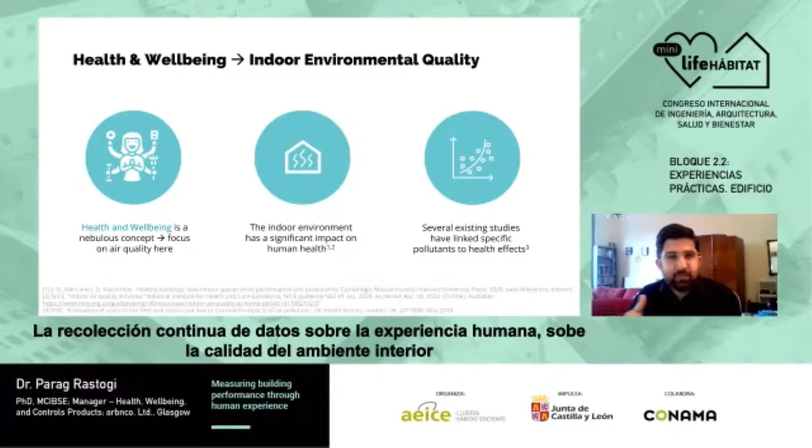The first thing is continuous monitoring and feedback. Continuous collection of data about human experience, about indoor environment quality, is a natural progression of green building best practice. So if you come to this conference, you're probably thinking about green buildings. If you're not thinking about them, you're at least acting on them. So you are probably a thought leader. You are here to learn.

I'd like to say that this is actually a natural progression to go from design intent to operational reality. The data gathered are useful beyond just compliance and certification. Obviously we want compliance, we want certification, but this data is actually more useful than just that—for example, for COVID and re-entry, energy efficiency, controls, and I'll talk a little bit about these applications later.

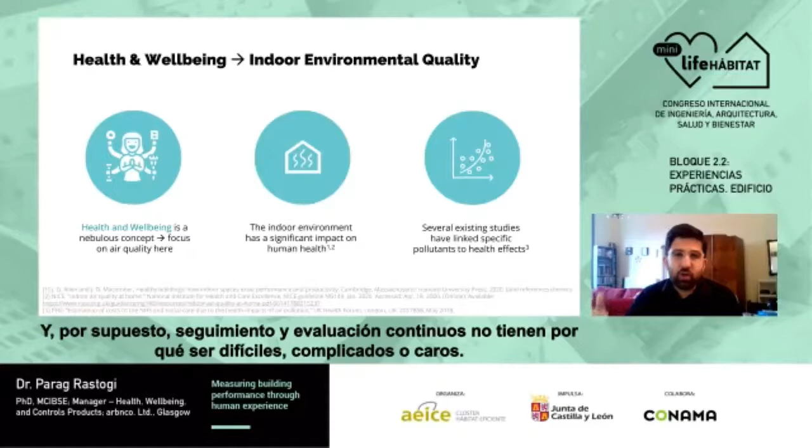And then, of course, continuous monitoring and feedback does not have to be complicated, cumbersome, or expensive. And that's a real myth that has to be busted. This is probably because, of course, when a technology is new, it can be a little cumbersome, it can be expensive. And people, I understand the hesitancy around sensors, around collecting feedback.

Do you want to expose the building performance? Do you really want to know what people are thinking? But this is all sort of growing pains. And as we move green buildings into the new era of healthy buildings, of buildings that promote health, data collection lets us begin to have an overview of what human-centric measurement would be.

So measuring building performance through human experience—what would this really entail? Before I address that, I really should talk about the fact that, okay, we're talking about health and well-being. That's one of the themes of this conference.

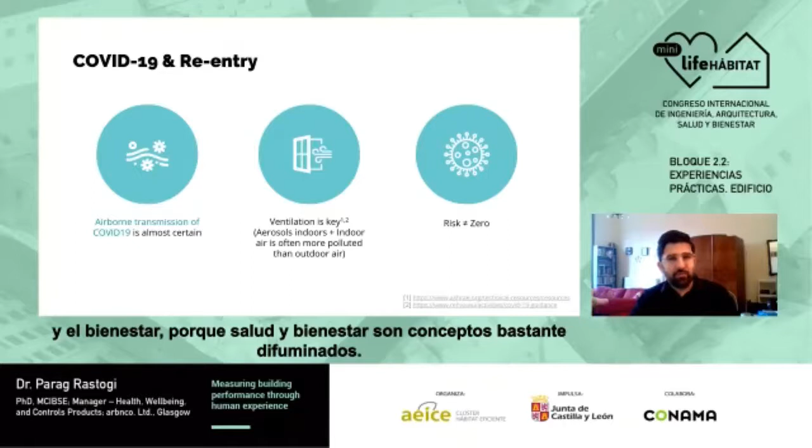In this particular presentation, I will focus on an aspect of health and well-being because health and well-being is a fairly nebulous concept. I'm going to focus on environmental quality, well, more specifically air quality here. So we're not talking about acoustic ambience or lighting, which are all important parts of environmental quality and influence your health and well-being. Health and well-being is also influenced by your HR factors, human resource factors, the environment of the workplace, and so on.

So in the context of building science, I'll focus on the indoor environment, especially how you measure it and how it affects health and well-being of humans.

We know it has a significant impact on human health. There are just a couple of resources I put down there. There are dozens and dozens of papers and books you can find on the impact of indoor environment on human health, especially air. There have been several existing studies that have linked human health to specific pollutants, and the environmental and human health and productivity impact of pollution. So it's not really up for debate anymore.

We spend up to 90% of our time indoors, so obviously the quality of the indoor environment has to affect how our long-term health pans out.

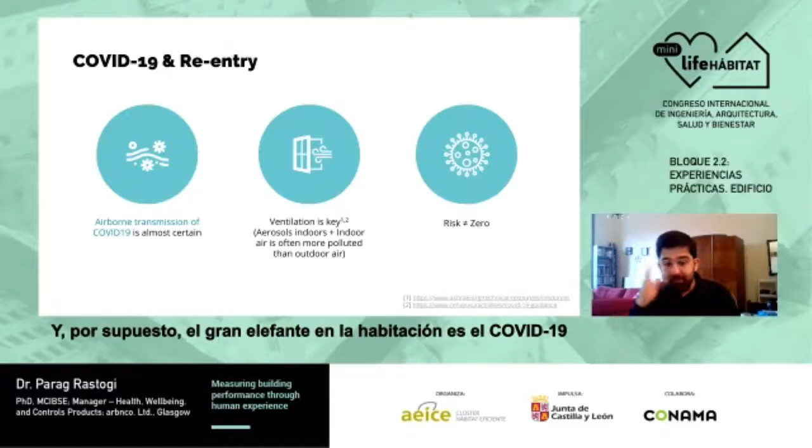And of course, the big elephant in the room is COVID-19. We know for sure that airborne transmission is certain. In fact, I should probably remove the word 'almost' there—it is certain. There is plenty of evidence.

We have, in fact—I just noticed I didn't have one of my key sources there, I can add it later—it's beyond doubt that airborne transmission of COVID is happening. If anything, it might be the dominant route.

I know there has been some controversy with the WHO, the CDC, and the EU not really focusing on airborne transmission at the beginning of the pandemic. We were very focused on disinfection of surfaces and all that stuff. Then more and more evidence built up that aerosol or airborne transmission is the dominant mode, which means ventilation is key.

I'll bring this back to why data collection is so important. Don't forget that indoor air is often more polluted than outdoor air, something a lot of us don't really think about. If you look around at all the pollutant sources in your house, from the kitchen range to carpets, and in your offices with printers and so on, you can begin to see why indoor air can be more polluted than outdoor air.

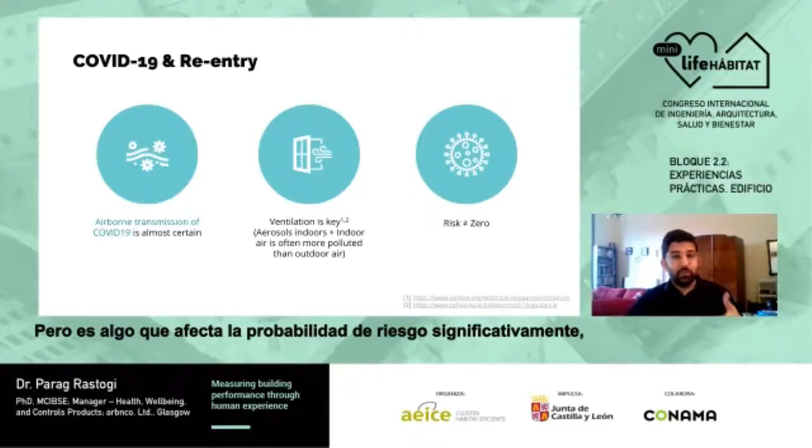Keep in mind that none of this data management, data collection, and feedback will make the risk exactly zero. That's not what we can achieve, and that's not what I'm going to claim. But it does affect the risk probability quite significantly—a better managed building will reduce your chances of transmitting COVID-19 through the airborne route.

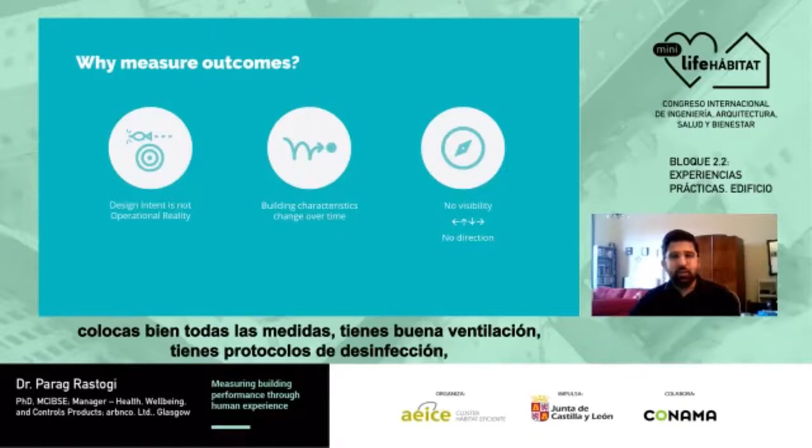Let's say you bought into the science and think that's a good idea, that's how we should go. So you've designed your building correctly, put all the measures in place. You've got good ventilation, disinfection protocols, administrative protocols to make sure people don't show up when they're ill. You've used the best materials so they don't give off VOCs, volatile organic compounds, and great filtration in your HVAC system, and so on.

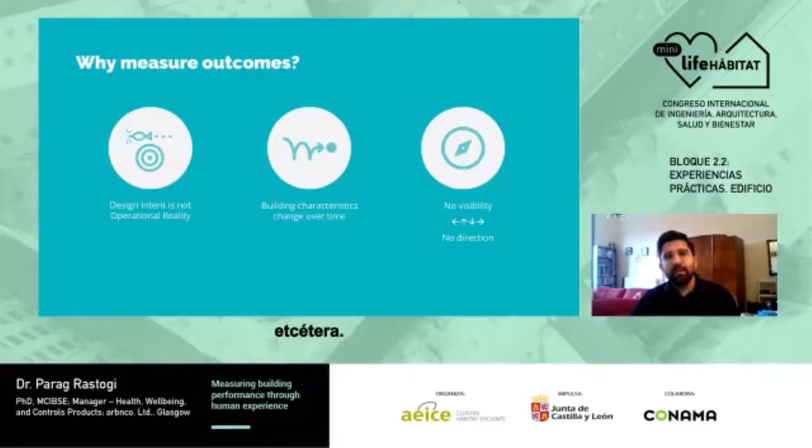But the problem is that design intent does not equal operational reality.

There's this big concept in the UK now and across the world called soft landings. A soft landing is when the design and construction team hands over to the operation team and owners—you don't just crash land. The handover isn't just 'here are the keys, bye.' It's more like, we commission the building, we show you how to work it. There are dozens of steps; you can look them up. Just Google soft landings, and I highly encourage you to do that.

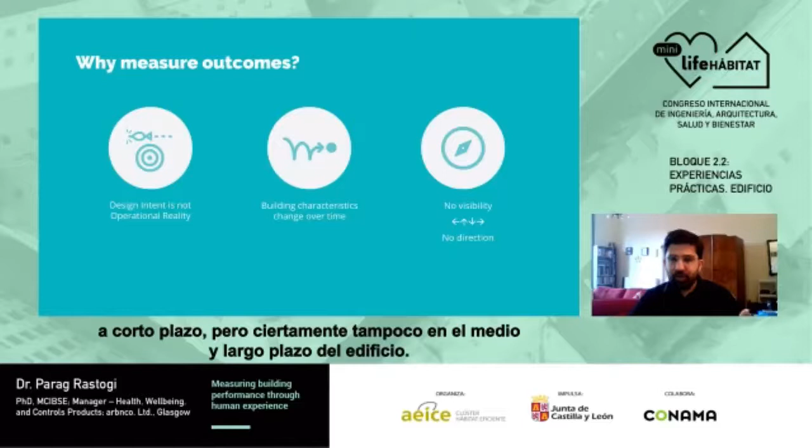The point is that design intent does not translate to operational reality in the short term, but certainly not in the medium and long term. Building characteristics change over time—usage can change, materials degrade, and the building surroundings may change. None of this is necessarily bad; that's just how buildings are.

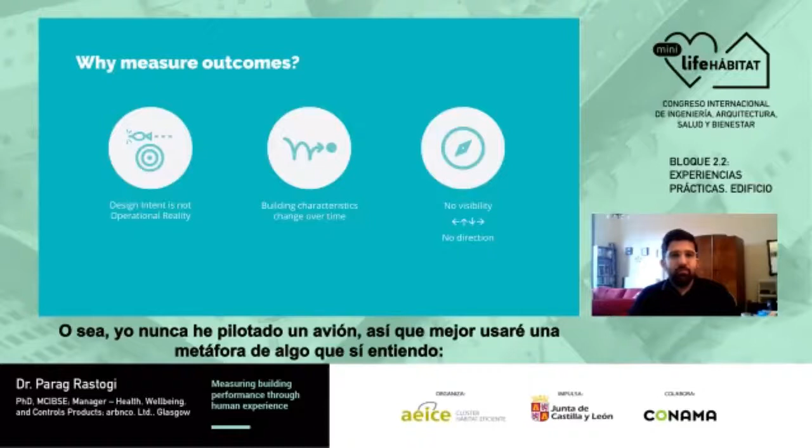So if you're not measuring the human experience in buildings, you essentially end up with no direction and no visibility. It's the equivalent of flying without radar, or—since I've never flown a plane, I'll use a metaphor I understand—it's like trying to ski in the mountains in complete fog. You don't even know which way is up.

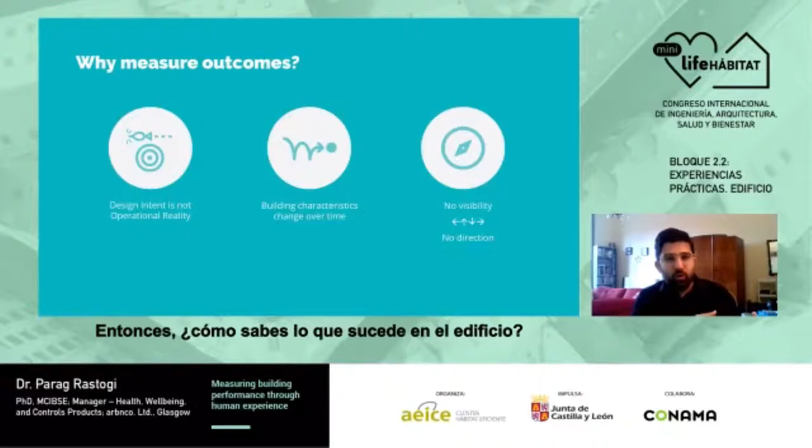When we think about buildings which are increasingly managed remotely—yes, some buildings have a facility manager on site, I'm thinking about office or big institutional buildings—a lot of buildings are now managed remotely. So how do you know what's going on in the building? Do you just wait for people to complain? By the time people complain, they're either annoyed, or they've lost productivity, or their health has been affected. So why are we waiting until that's actually happened?

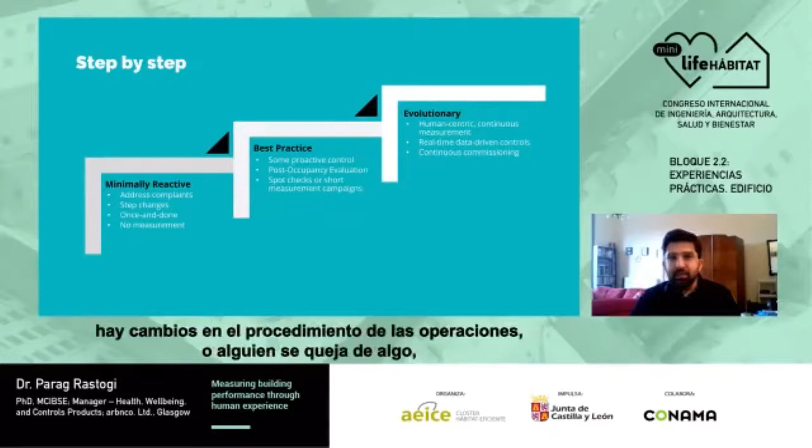Thinking about how to go step by step from where you are as a green building professional—in my minimum category, I've already put what you'd expect a high performance building to be today. You need to address complaints. There are step changes in operations: somebody complains about something, and you change it—temperature, ventilation, whatever it is. It's once and done; you make the change, and that's it. You come back for the next problem and solve that one.

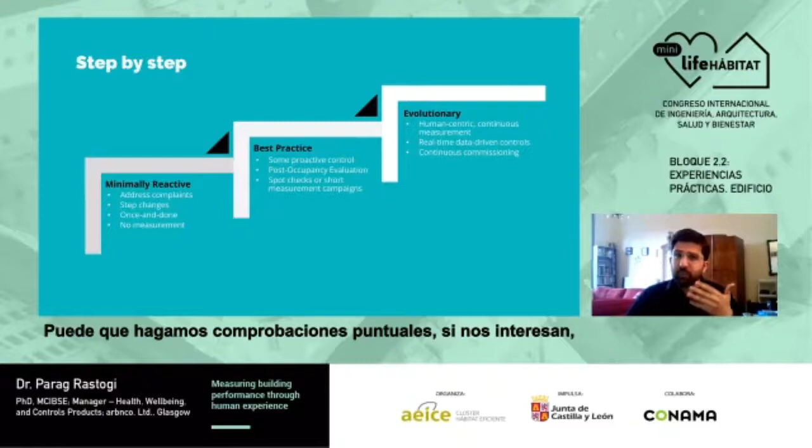And there's usually no measurement, though there might be some spot checks if you were interested in that sort of thing. If you had a more forward-thinking team, you might have done a little bit of measurement. So let's say you moved on to best practice—then you have some proactive control.

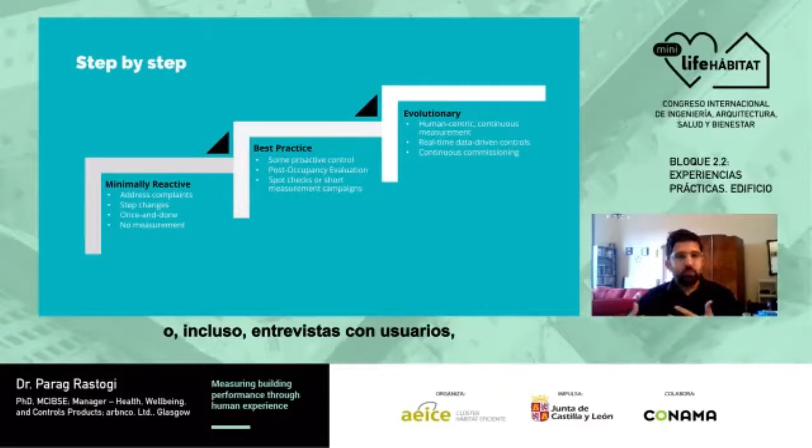You can anticipate a little bit what the usage of the building is going to be, what the climate is going to be, and then you change according to that. You do some post-occupancy evaluation, which usually takes the form of surveys or interviews with occupants. Maybe the facility manager or the design team comes back and visits the building again and talks to the occupants.

And you might do spot checks and short measurement campaigns. So, going from a no-measurement or very little measurement paradigm to saying, okay, well, we do some sort of regular spot checks, or every once in a while, if there's a complaint of something specific, we investigate it with data. Well, what I'm talking about is the next level, the evolutionary trajectory that we should be taking.

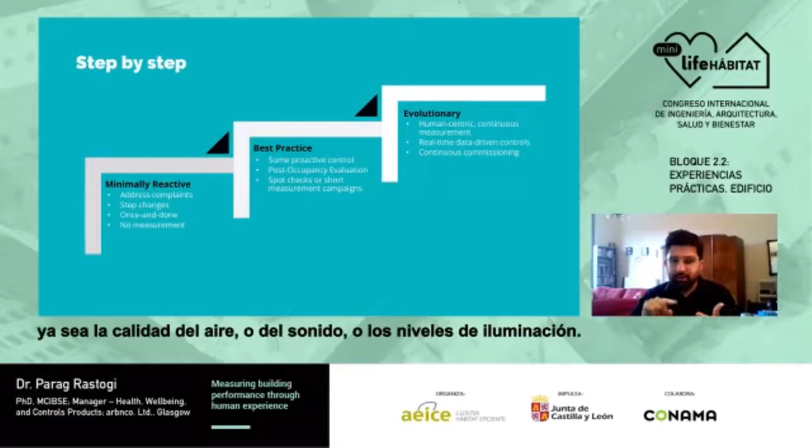And that's human-centric continuous measurement. I know this word human-centric sometimes doesn't, it's also a little bit nebulous. What I mean by this is measuring parameters about a building that matter to the human experience, whether this is air quality, acoustic quality, lighting levels, accessibility, perception of the indoor environment, and so many other things, right?

I'm just going to focus a little bit more on air quality today, but there are other aspects here. Because that's my specialty. So I should talk about what I know, right?

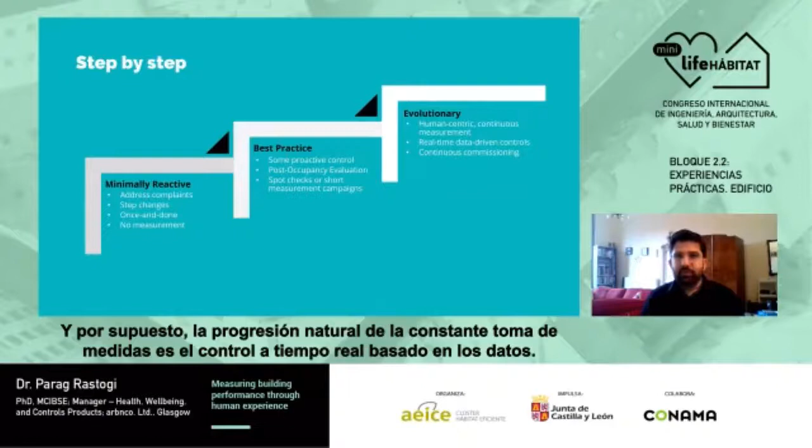And of course, the natural progression of continuous measurement is real-time data-driven controls. Again, this doesn't have to be particularly complicated. I know this sounds like I'm adding so many buzzwords here, real-time, data-driven. But all that means is you have a control mechanism that responds to data that is relevant to the human experience, whether that's high resolution air quality measurements or occupant feedback or anything of that sort, right?

And of course, that leads to this idea of continuous commissioning. Continuous commissioning is by no means a new idea. It's existed for decades. I heard about this when I was in university, and that was some time ago. So, we're just trying to enable continuous commissioning

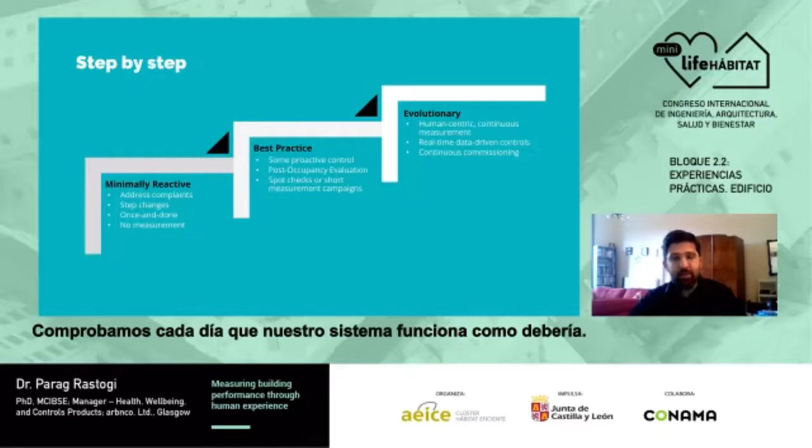using automation, using measurements, including stakeholders such as the people who occupy the building, so that it's truly continuous. It's not just, you come in once every 5 years and check, some human being goes around and checks everything and ticks boxes to make sure that the system is working as intended. We check every day, every hour, that the system is working as intended. It's delivering the human outcomes that should be delivered.

This framework that I'm talking about, I'll break it down into 4 simple steps, right? Obviously, nothing's ever going to be completely as simple as I'd like to make it out on the slide, but let's try and at least break it down into 4 categories. So, at the top lies, of course, engineering and administrative policy. You need policy, you need buy-in from all stakeholders. You need to build on existing knowledge to propose engineering and administrative policy.

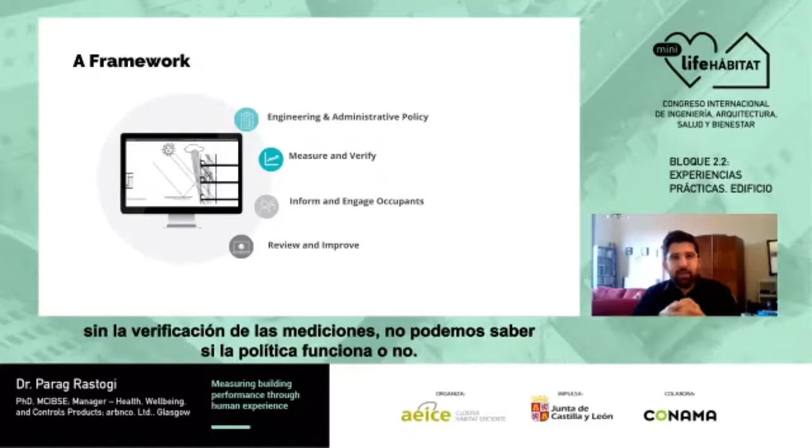The second step is you must include measurement and verification, because one of the reasons it's necessary to measure human experience in this context is because without measurement and verification, you don't know if your policy worked or not. The third part is, of course, informing and engaging occupants, the people who occupy the building, and review and improve, cycling back again, right?

So let's get a little bit into the nitty-gritty of what I'm talking about, what kind of measurements I'm talking about. So what are we actually measuring, right? In this case, I'm talking about air quality. Like I said, there are other aspects of environmental quality and human experience that I won't necessarily touch on today, but they do exist. So in the case of air quality, for example, health outcomes and pathogens are actually difficult, maybe impossible to measure directly.

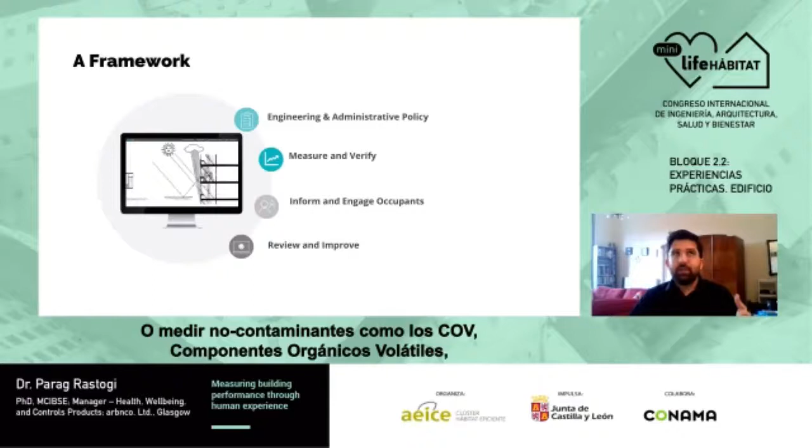So what we end up doing is we measure indicators, such as CO2, or measure known pollutants such as particulate matter or TVOC, total volatile organic compounds. I'm sure these are keywords you've been hearing a lot about recently, if not before that. And we test periodically for hazards, your really nasty chemicals, and often that ends up being statutory compliance, so your compliance with laws.

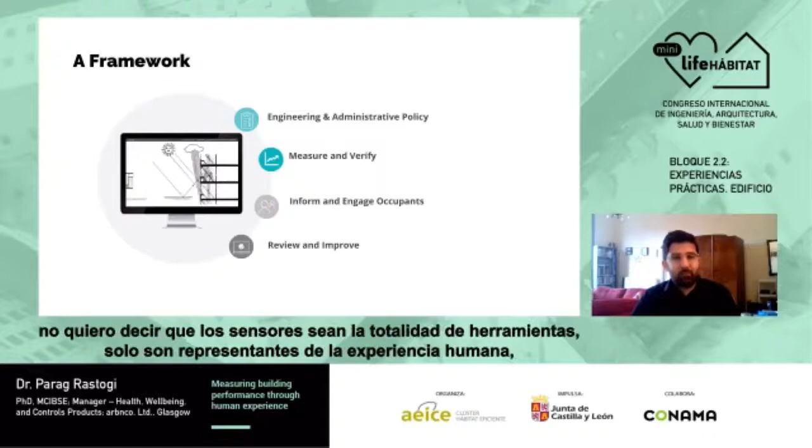And as far as the human experience that we can measure, we do need to track outcomes not measurable by sensors. I'm not saying sensors are the be-all and end-all of everything. They're just proxies for the human experience. We need proactive feedback, so are the policies actually working?

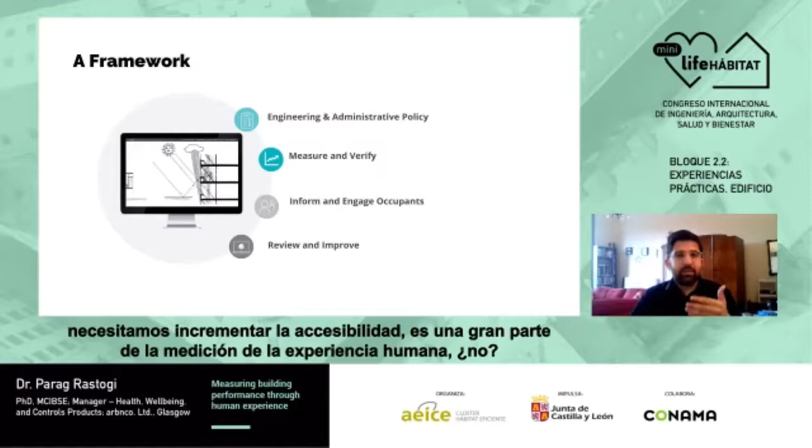Are there hazards developing, or are they being controlled? Nobody knows this better than somebody who's actually in the building. And of course, we need user acceptance. We need to increase accessibility, and that's a big part of human experience measurement.

There are some caveats here. There are unproven technologies being sold right now. I won't go into the details of what they are, but just because there's a novel measurement doesn't mean it's useful, doesn't mean it's valid. You need to look out for the validation.

I'm a seller of measurement tools and systems, and I will say to you, don't believe me. Make sure you have independent academic verification, institutional verification of the claims that manufacturers are making. Ask for data sheets, ask for validation studies.

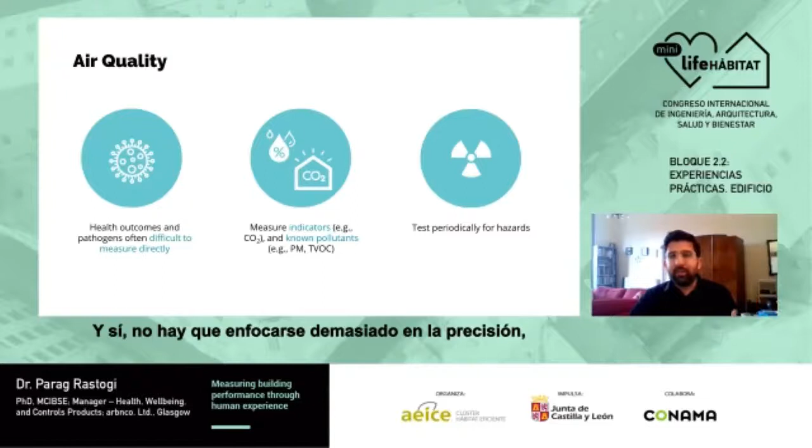Yeah, I mean, I get it. Don't get too hung up on accuracy and whether it goes to the second decimal point. Let's put this into context, let's have some perspective. But the utility of each measurement should be proven before you start doing it, because sometimes if you measure the wrong thing, you might end up optimizing the wrong thing and sort of make things worse.

Too much focus on measurement can detract from human experience. So yes, I'm talking about measurement and data relevant to human experience - how to measure building performance for human experience.

Sometimes, and I'm guilty of this as much as anybody, it's so exciting to measure things using sensors that we sort of forget about the fact that actually at the end of the day, it's a human experience that I can't really quite measure. I can only do proxies.

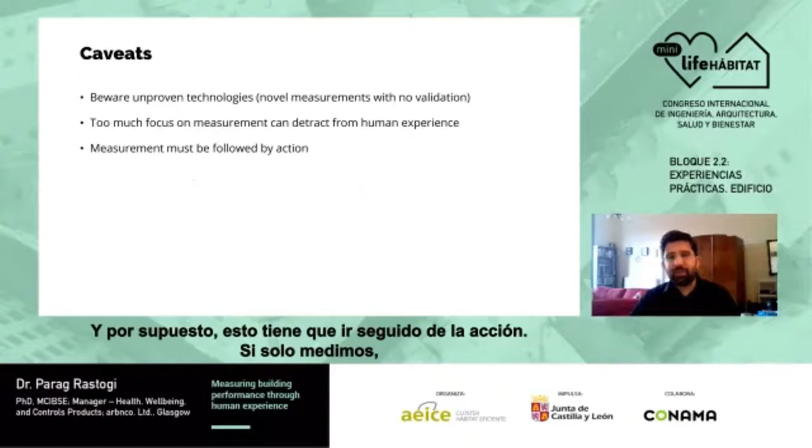And of course, it must be followed by action. If you just keep measuring, it can lead to disillusionment, where it's like, okay, well, we highlighted problems and nothing seems to have been done about it.

Of course, the second big question being when to measure. So as you can see from my subtitle there, my bias is you should measure all the time and everywhere. So I'll talk a little bit about the difference between continuous and one-off measurements. I'm talking in the context of air quality, but this applies to really any measurement.

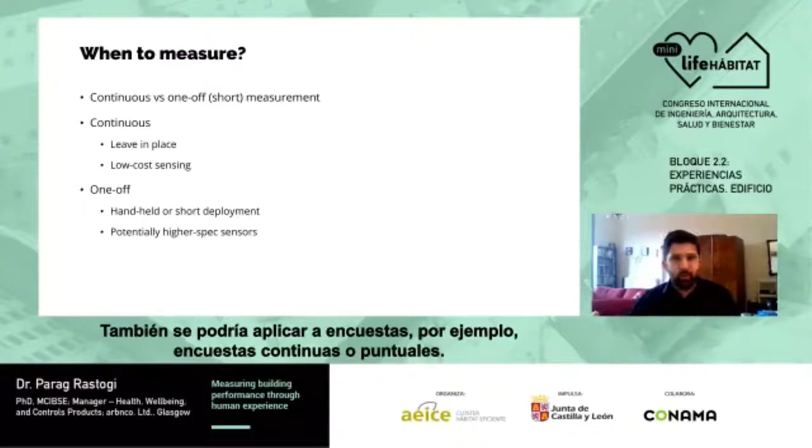It could even apply to surveys, so continuous surveying versus one-off surveying. Just to make the distinction, continuous is leave in place, low cost, and one-off is handheld or short deployments, potentially higher spec sensors - so potentially more expensive, but also more accurate sensors.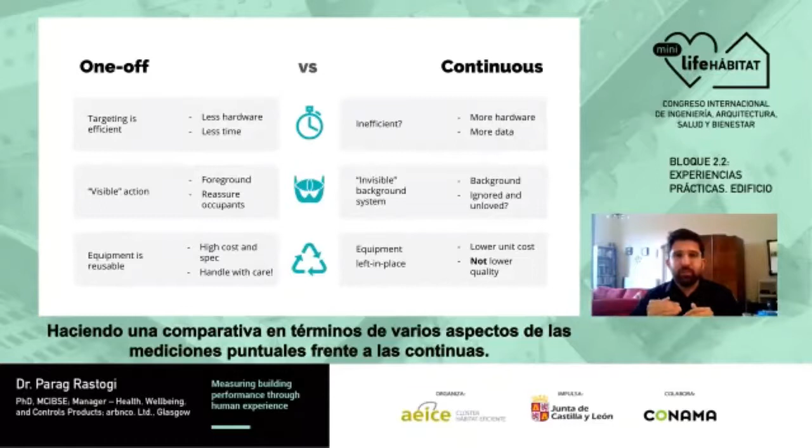In comparison, in terms of various aspects of one-off versus continuous measurement, when you do a one-off measurement, you're targeting the measurement. That can be quite efficient, because you'll probably need less hardware, less time, and because you know exactly where the problem is, you go there, you measure, you ask people, you survey people, and you try to characterize the problem.

This means continuous monitoring could be potentially less efficient, because you require more hardware, you need to leave it in place, and you have a lot more data. Let's not underestimate handling data and how complicated that can sometimes be.

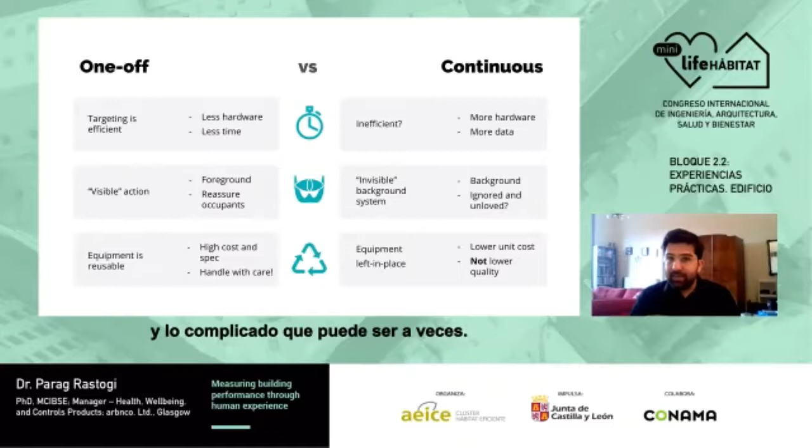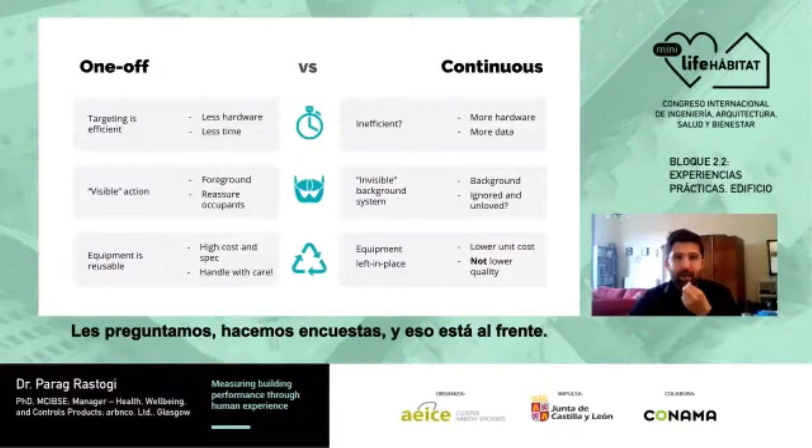You do address a visible action when you're talking about one-off measurements. A problem occurs - when I say visible, I mean perceptible - a problem occurs and somebody talks about it, somebody complains about it, and then you go and reassure the occupants by putting in measurements. You go and ask them, you do surveys, and it's very much in the foreground.

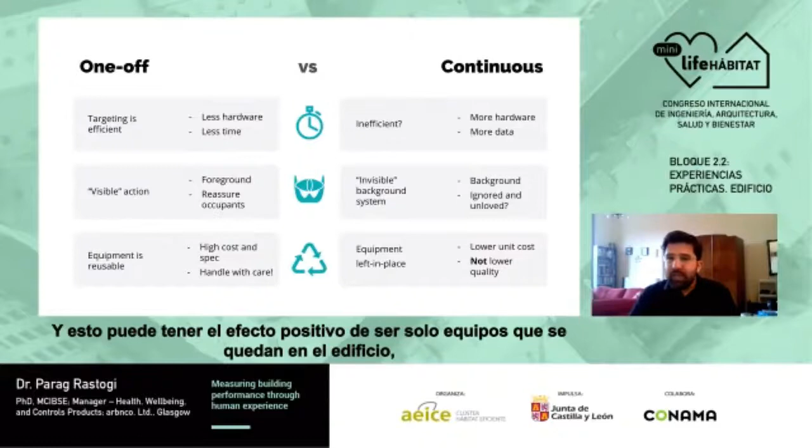On the other hand, a continuous monitoring system could be invisible in the background, and it could potentially be unloved, ignored, right in the background. Nobody understands why those bits of kit are in the office, and you just leave them there. This can sometimes have the effect of hardware that stays in the building and nobody knows why it's there, and people lose interest in it. So that is definitely a potential downside of continuous monitoring.

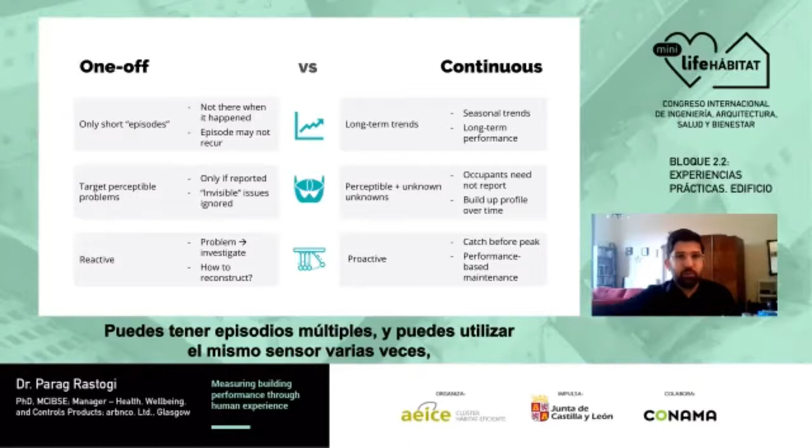On one-off measurement, equipment is more expensive, but it's potentially reusable. So you can have multiple episodes, and you can use the same sensors several times. But be careful, because it's often quite difficult to manage scientific grade sensors.

When you leave the equipment in place for continuous monitoring, on the other hand, you will have lower unit costs - the sensors are going to be cheaper. In fact, sensors are getting cheaper all the time. But that does not mean it has to be lower quality. This is really a line I must draw under: low cost does not mean low quality anymore. It's good enough quality that you're looking for.

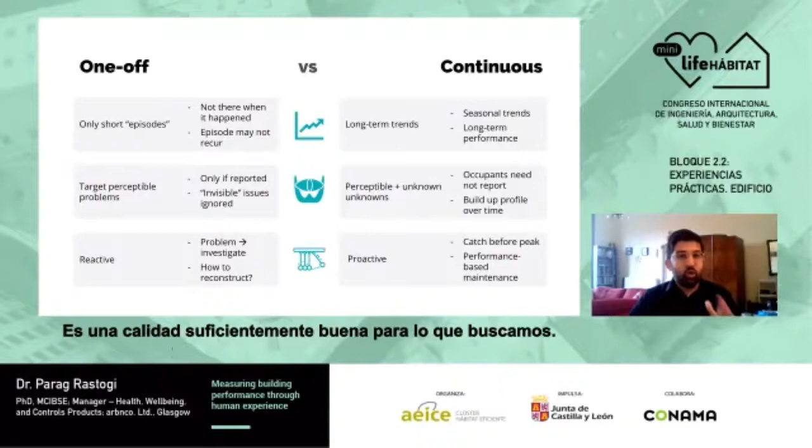Of course, the trade-off there is that you end up measuring only short episodes with one-off sensing. You may not be there when it happened, you may not be able to reproduce the episode, it may not recur on its own.

Whereas with long-term continuous monitoring, you can check trends, seasonal trends, long-term performance, which people completely forget. The building is going to be around for decades and decades.

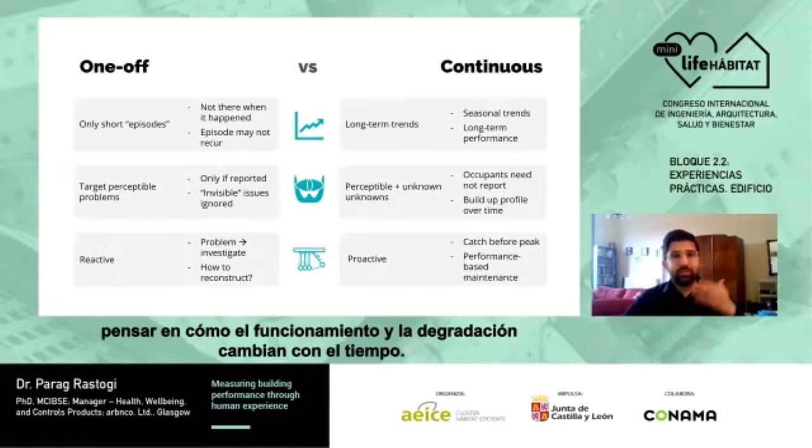You target perceptible problems, but only if they are reported, so invisible issues are ignored. Sometimes air quality issues and environmental quality issues are invisible.

Whereas with continuous monitoring, the occupants don't necessarily need to report. You can just build up a profile over time. With one-off monitoring, you're being reactive: you have a problem, you investigate, and then you have to reconstruct the problem.

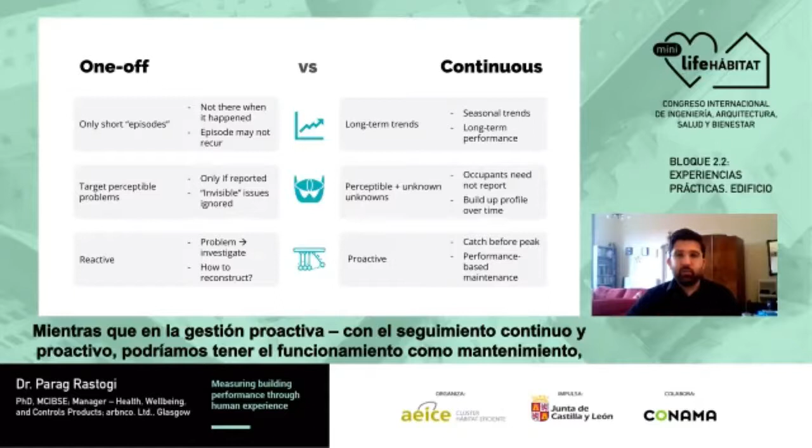Whereas in proactive management, with proactive continuous monitoring, you could have performance-based maintenance. You could catch the problem before it actually peaks, which is very useful to have. That was sort of my big spiel on when to measure, the temporal aspect of it.

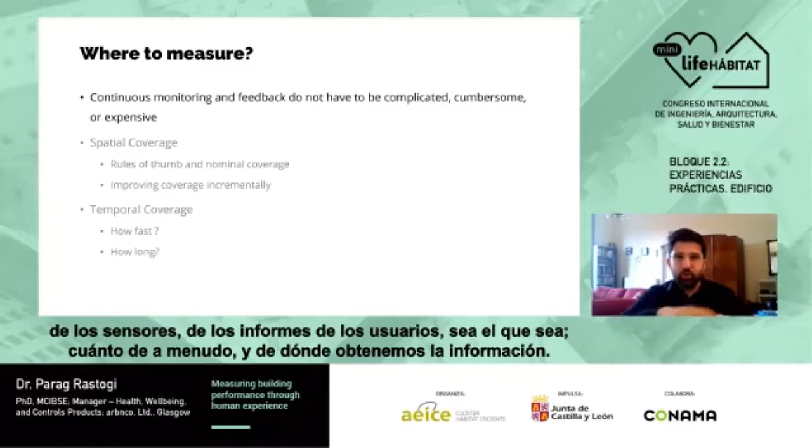I'll talk a little bit about where to measure. One of the things I said was continuous monitoring and feedback do not have to be complicated, cumbersome, and expensive. So I'll talk a little bit about spatial coverage and temporal coverage of sensing, of occupant feedback, whatever it is. How often and where do you get your feedback from?

Let's talk a little bit about rules of thumb for spatial coverage, nominal coverage, and how to improve it incrementally.

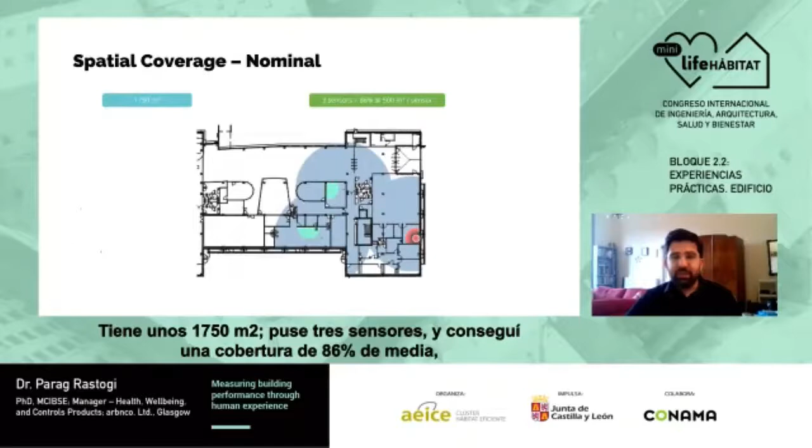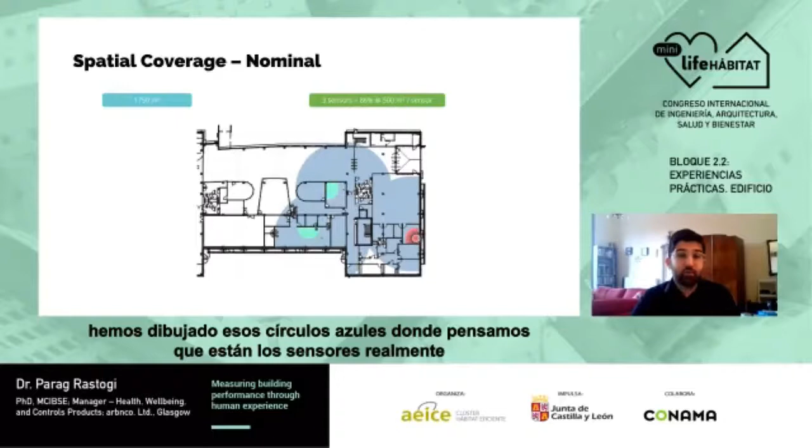I'll use the example of this building. I can't show you the whole building because it's a client's building, but trust me, this is a real building somewhere in Europe, about 1750 square meters. I put 3 sensors there and got roughly 86% coverage if you assume 500 square meters coverage per sensor, which is just a nominal coverage. We've drawn those big blue circles around roughly where we think the sensors actually are in the building right now, and as you can see, this coverage is extending beyond walls.

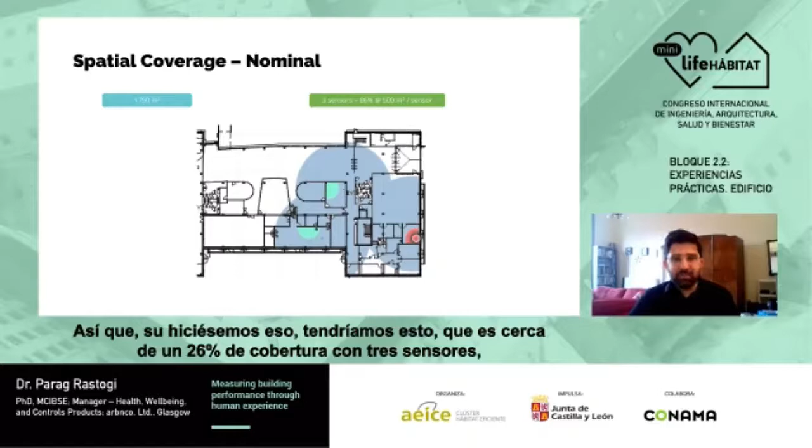So is that really a good idea? Does nominal coverage actually make sense, or should you really only consider that when a sensor is placed inside four walls, it only covers that room? If you were to do that, you'll end up with about 26% coverage with 3 sensors, because those sensors are inside rooms, and the coverage is reduced drastically.

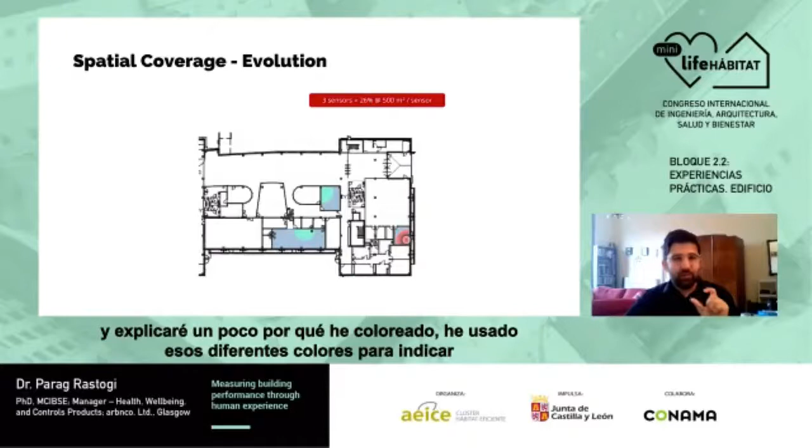My point in showing this and the next slide is to show that nominal coverage is a good place to start, but it's definitely not something we want to end up with for the rest of the decade or whatever. It needs to evolve a little bit as our tools to deploy get more sophisticated. I'll explain in a bit why I've used those different colors to denote 86% being green and 26% being red.

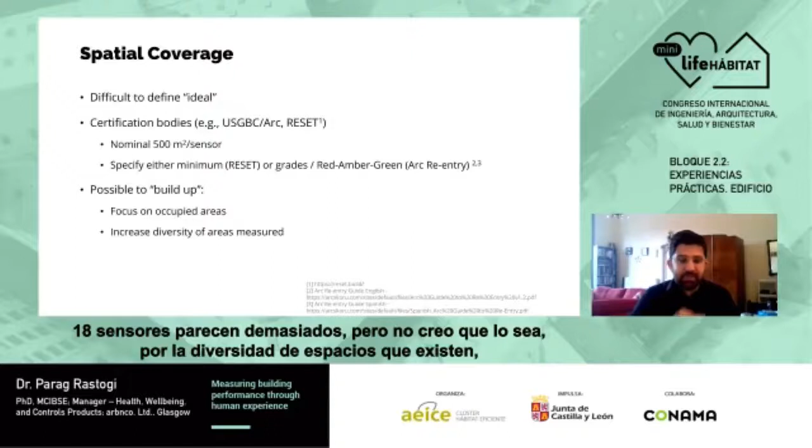I don't think it is, because there is a diversity of spaces, a diversity of usages. This space is well occupied, there's a fair amount of people there, so you do need to cover their changes in experience and locations as you go around the building.

As I said, it's difficult to define an ideal coverage, and you end up leaning on certification bodies, on standards. There seems to be a consensus developing around this nominal idea of a sensor covering 500 square meters. That's a slightly arbitrary number, and I think it's on the higher side of what a sensor can be set to cover. It depends a lot on the air distribution in a space, the usage of the space, how many people are in it, and so on.

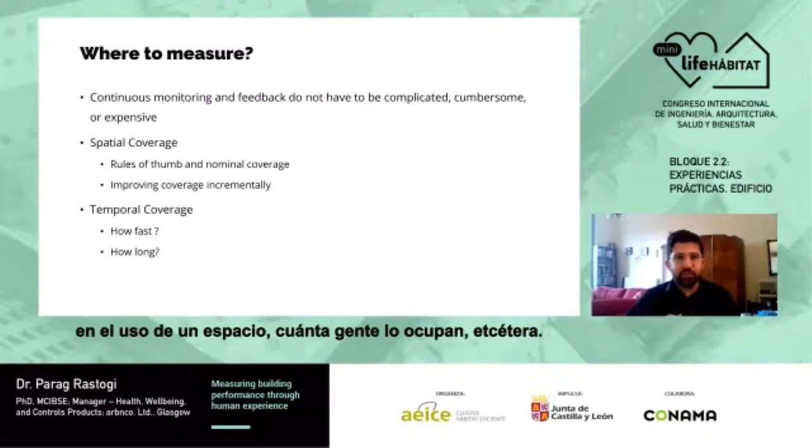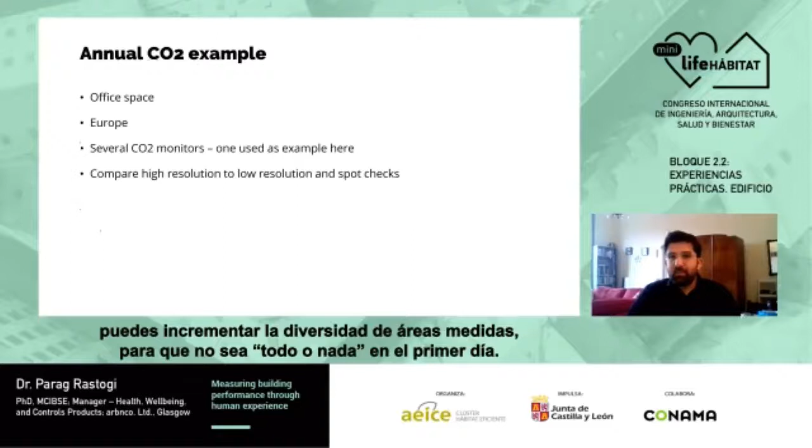But it's a place to start. It helps us standardize things. Certification bodies will specify either a minimum or some kind of red, amber, green grades. It's possible to build up over time. You can focus on occupied areas and build up over time, and increase the diversity of areas measured. So it's not all or nothing on the first day.

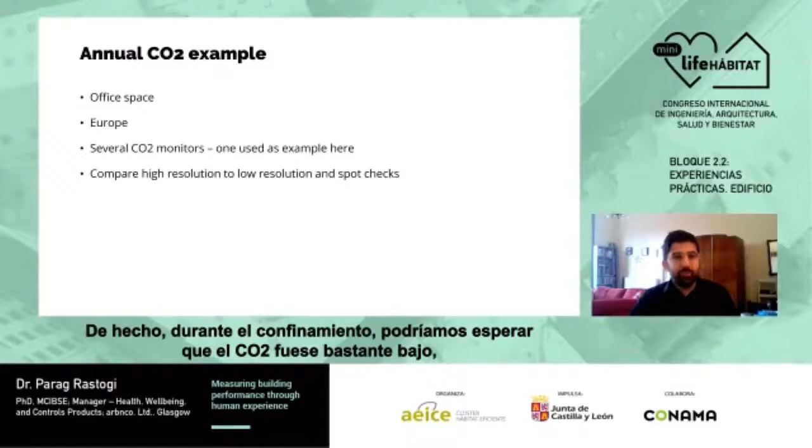Moving on to the second part, temporal coverage. I'll use an example of annual CO2 measurement from an office space in Europe. There were several CO2 monitors; I'm just using one as an example here, not an extreme one. It's a fairly regular measurement. In fact, during lockdown, you'd expect CO2 to be fairly low. I'll compare high resolution to low resolution and spot checks.

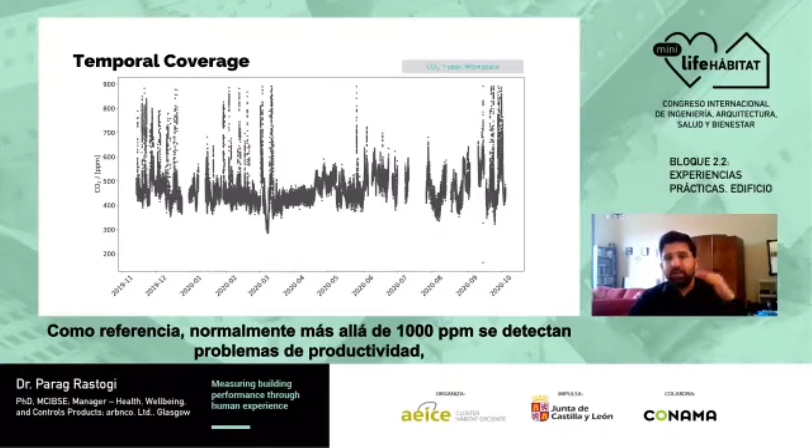So for temporal coverage, this is one year of workspace measurement. You can see there are some gaps. We're measuring CO2 here, and there's not really too many problems because even the peak doesn't really go much beyond 900 ppm, or doesn't go beyond 900 at all. For reference, usually above 1,000 ppm is where you start getting productivity issues. You might definitely get lack of ventilation, and potentially overcrowding.

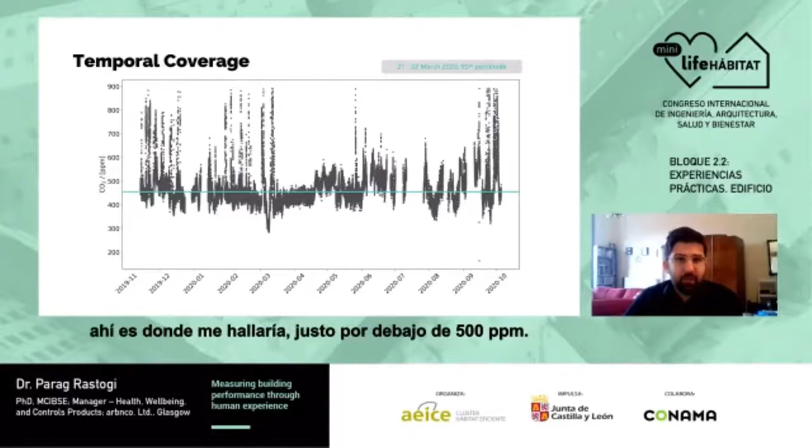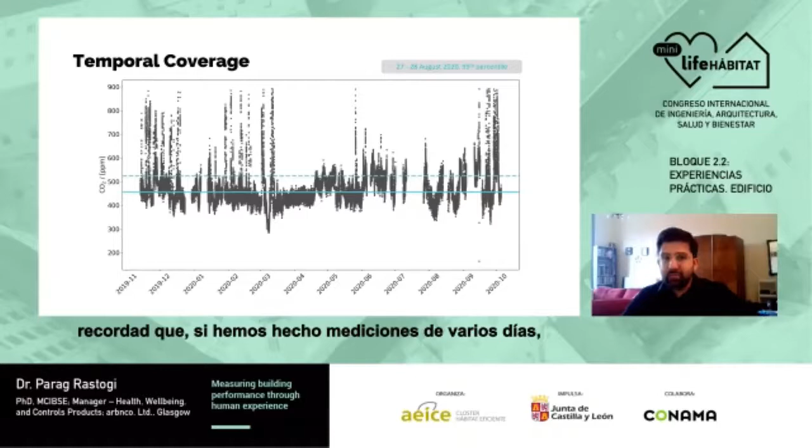So if I was to measure this on one day, the 21st or 22nd of March, and took the 95th percentile of that day, which is a pretty common way to measure things, I'd end up just under 500 ppm. This is clearly not representative of the annual profile of measurement in that room. So I took another arbitrary day of the year and the 95th percentile, and it was slightly higher, but again not representative. It doesn't really matter which day I took because it wouldn't be representative. My point here is spot checks can be helpful, but remember, you've done an entire day's worth of measurement here - hung around doing measurements for the whole day - and it's still not representative of the long-term evolution of CO2.

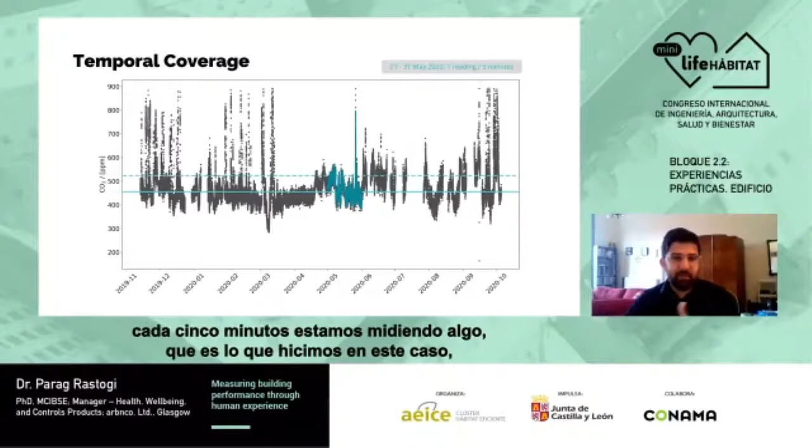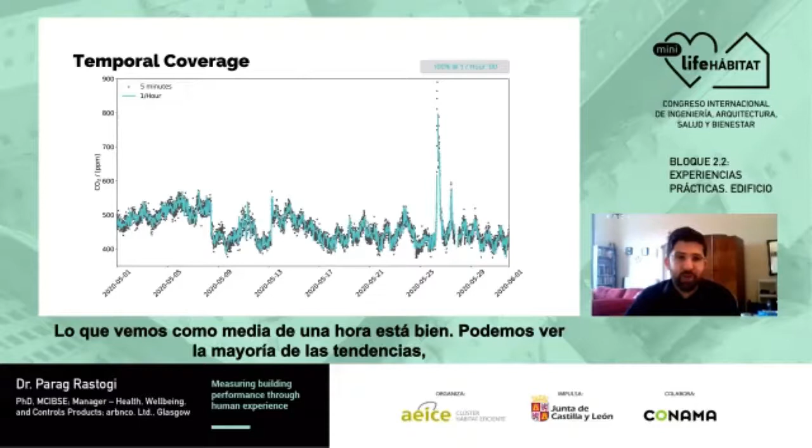If you assume 5 minutes to be the truth - I know you can get higher resolution than that, it's entirely possible, we just happened to land on 5 minutes in this case as the highest resolution we measured - what you see is an hourly average is fine. You can see most of the trends, you can see the peaks, the diurnal variation is quite evident. It makes sense if you look at this. I know the variation isn't huge because the area was quite sparsely occupied during 2020, mostly just essential staff. But you can see that once per hour is still doing a good job.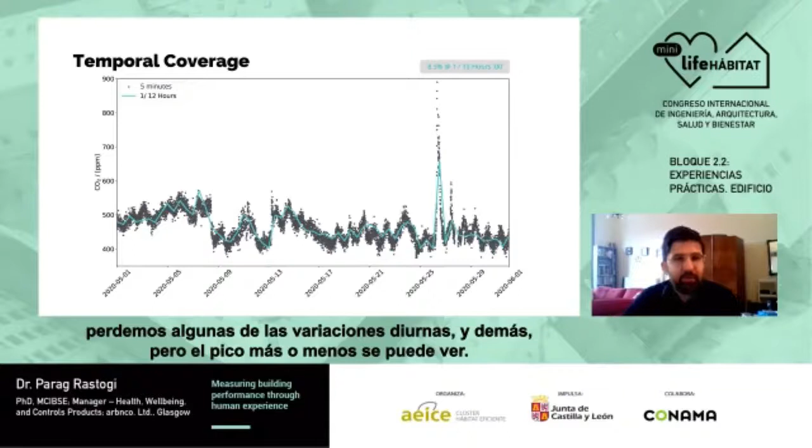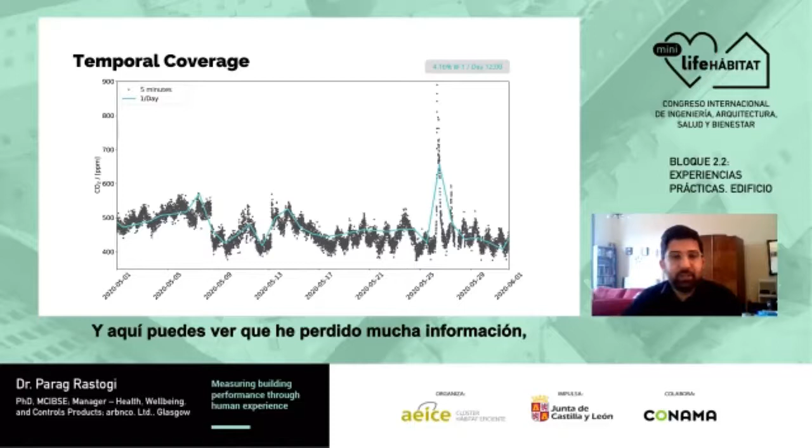Then in the next slide I do 4% coverage, which is one per day - 4% of the total hours in a year are being covered by a measurement. Just think about how small a number that is, if you just do one measurement per day, which is already way more than you do in a spot check. Here you can see I've lost a lot of information. Next slide, if I went once a month, or once a year, I'd get less than 1% coverage.

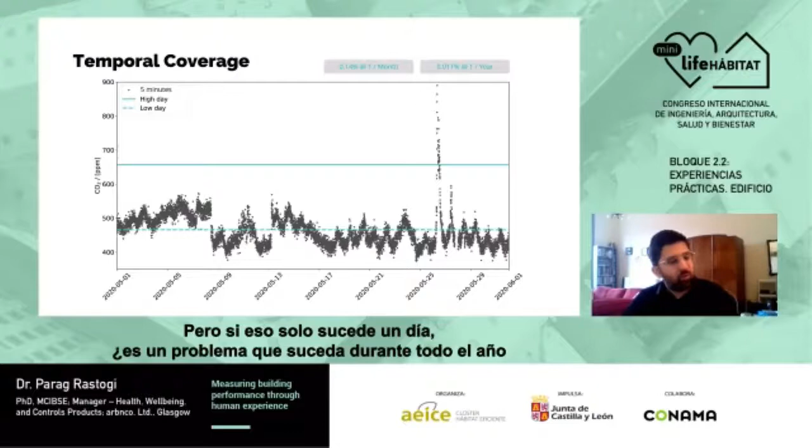Depending on whether I took the measurements on a high CO2 day or a low CO2 day, I could end up with radically different representative measurements. The numbers aren't too big in this case, but there are clear differences and they don't represent the space. We have other examples of places with 3,000 on a particular day, but that just happened on one day. Is that really a problem that occurs throughout the year? Well, you wouldn't know unless you did continuous measurement.

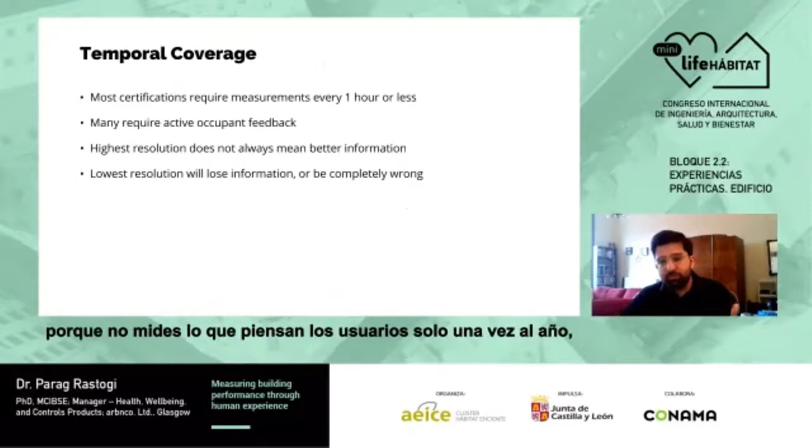So let's finish up on temporal coverage. Most certifications require measurements every hour or less. Many require active occupant feedback. That's also an aspect of temporal coverage, because you don't just measure once a year what your occupants are thinking - you have to do it continuously. Highest resolution does not always mean better information, but lowest resolution will definitely lose information or sometimes be completely wrong. So there's a very good argument from a temporal coverage perspective for continuous measurement rather than one-off.

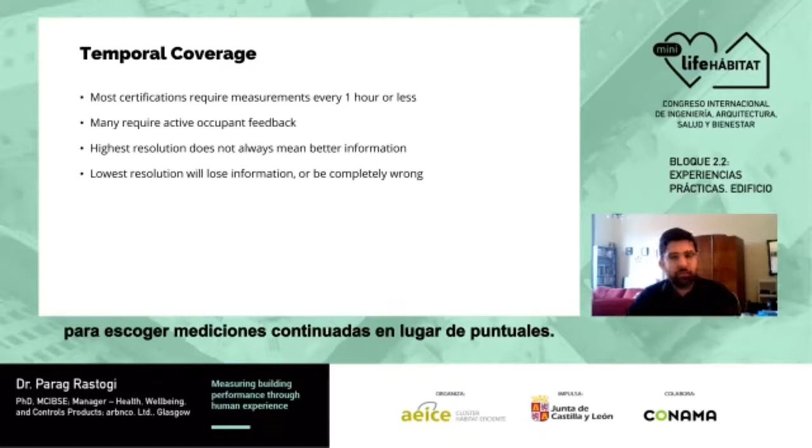So I'll finish up with the implementation ideas. I've gone through quite a lot of the technical aspects of measurement for human experience. It's really quite simple, the implementation workflow.

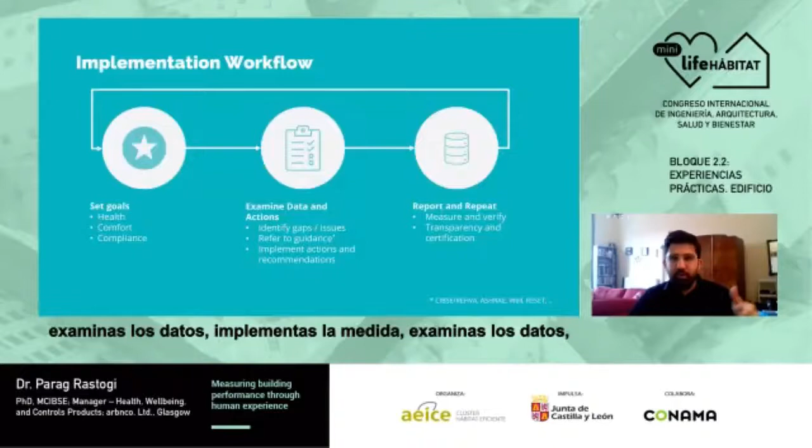You set some goals - are they health, comfort, or compliance? You implement the measurement, examine the data, identify gaps. You include stakeholders, refer to guidance - there's plenty of guidance from REHVA, from CIBSE, from ASHRAE, and so many other standard setting bodies. Then you implement the actions, and of course measure and verify. You might display the data for transparency, you might send it for certification - there are services that will send the data to certification automatically for you if that's an outcome you desire. And of course, you repeat.

Not really rocket science. This is pretty much a standard way of implementing any novel system in any situation. After installation, once the measurement and feedback system is installed, we have to keep in mind that there are incentives and responsibilities to set. So who is managing the data and the hardware? Is there somebody on site, or somebody remotely? Who is the stakeholder who acts on the data? Somebody complains, you get feedback from an occupant - does somebody act on it? And who is affected by the collection of this data?

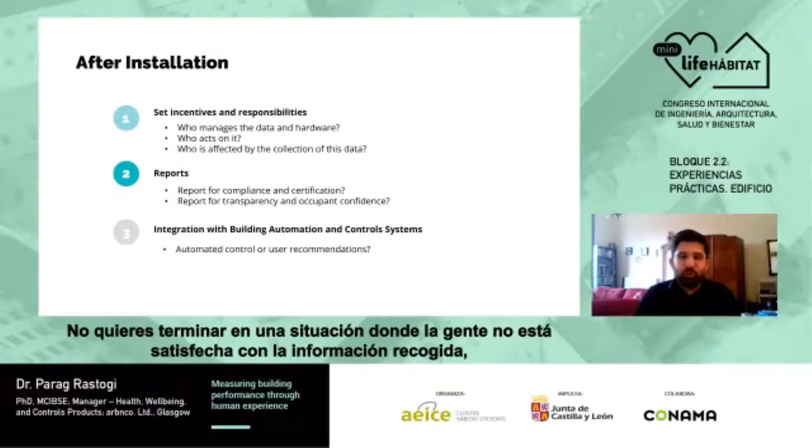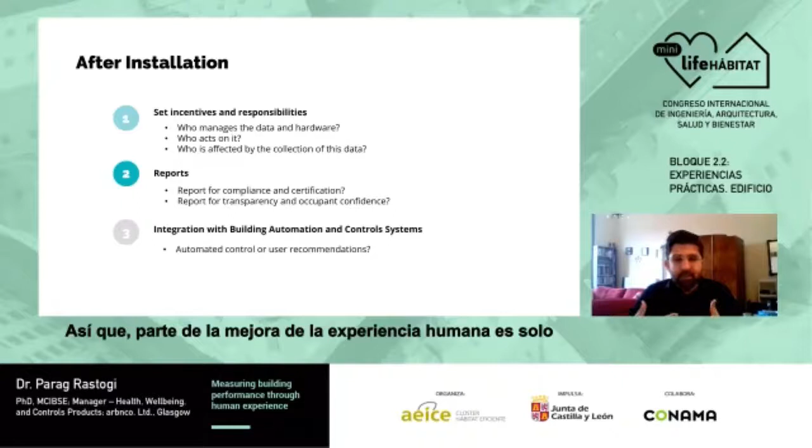You don't want to end up in a situation where people are unhappy with the data collected, and they don't want to show it, they don't want to act on it - that could sometimes make the problem slightly worse. Do you want to report for compliance and certification only, or also for transparency and occupant confidence? Part of improving human experience is just displaying how the building is doing and showing improvement over time. And do you want to integrate with building automation and control systems, because that capability exists now, and a human being doesn't have to be involved in every decision in the building.

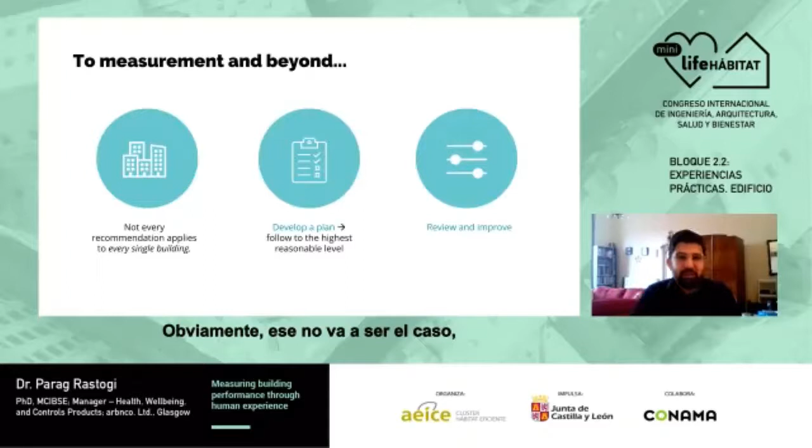Not every recommendation that I've talked about here applies to every single building - obviously that's not going to be the case. It's quite simple to think about developing a plan and then following it to the highest reasonable level, and of course reviewing and improving as you go.

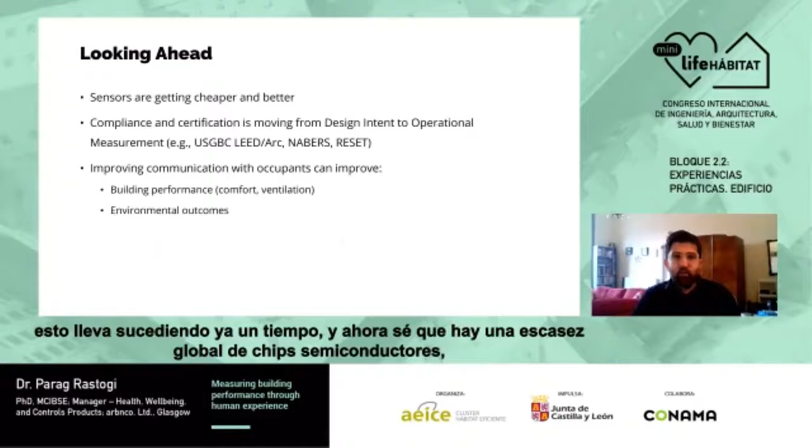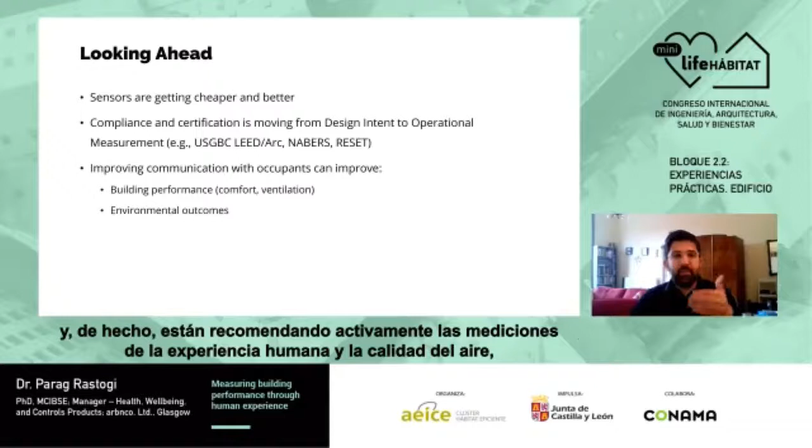Just to conclude, looking ahead at where I think this area is going: sensors are certainly getting cheaper and better. This has been happening for a while, and I know there's a global shortage of semiconductor chips at the moment, but that's going to ease at some point. Compliance and certification is moving from design intent to operational measurement, whether it's the United States Green Building Council, whether it's NABERS, RESET, really any certification. You see the new recommendations from CIBSE and ASHRAE - they've started actively recommending measurement of human experience, air quality, acoustic quality, and so on.

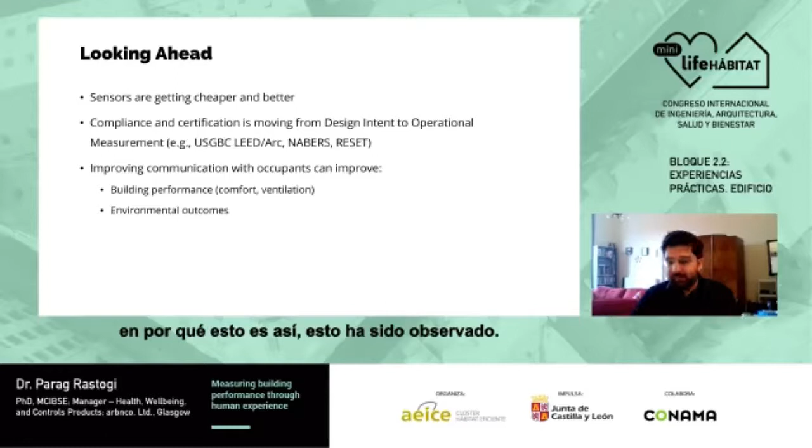Improving the communication with occupants can improve building performance through comfort improvements, ventilation improvements, environmental outcomes. There's plenty of literature on this - I won't go into the literature about why this is the case, just that this has been observed. Finishing up with the key takeaways, I hope I convinced you through my presentation that this is backed up with evidence and arguments.

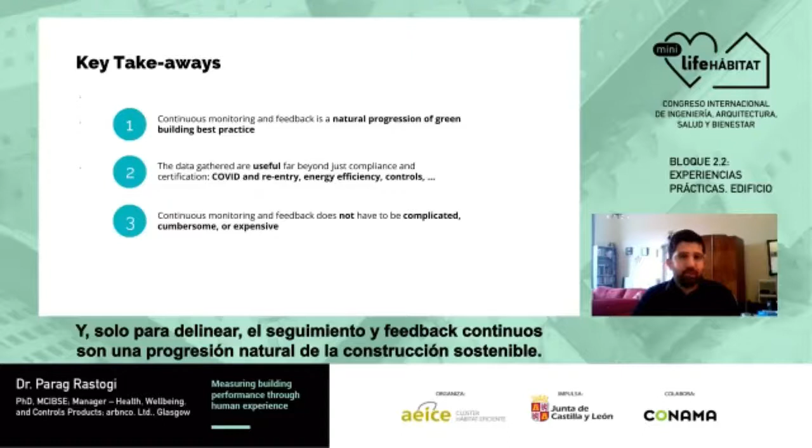So to repeat, continuous monitoring and feedback are a natural progression of green building practice. It doesn't have to be cumbersome, complicated, or expensive. The data gathered are useful, and you're essentially taking what is now best practice and evolving it to the next level in building performance.